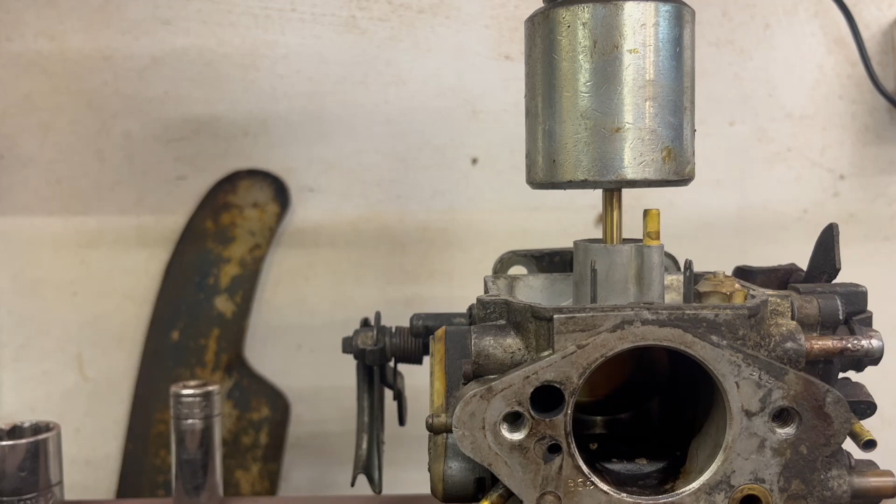Probably too much now. Now, radiator's hot. Oh! I didn't put the damper spring back in. Right.

Hello, welcome to my Saab 90. This is actually a refilm, hence the different wheels, because the first intro I filmed was terrible. So I'll just try to remember what I said. Let's just free flow - this is my Saab 90.

I got it just over a year ago, and it hasn't been on the road since about 2001. Basically all I did was change the oil as a precaution, put some fresh fuel in, a fresh battery, and it literally fired right up. I've had to do the usual countless welding on it because it's an old Saab that's been off the road for a while.

It was just about ready for an MOT until I plugged the old CO tester onto it to make sure it had a chance of passing the emissions test. It was sky high, and I did everything to the carb to try to adjust it, but I couldn't get it below about 9% CO, and I think it needs to be about 4% maximum.

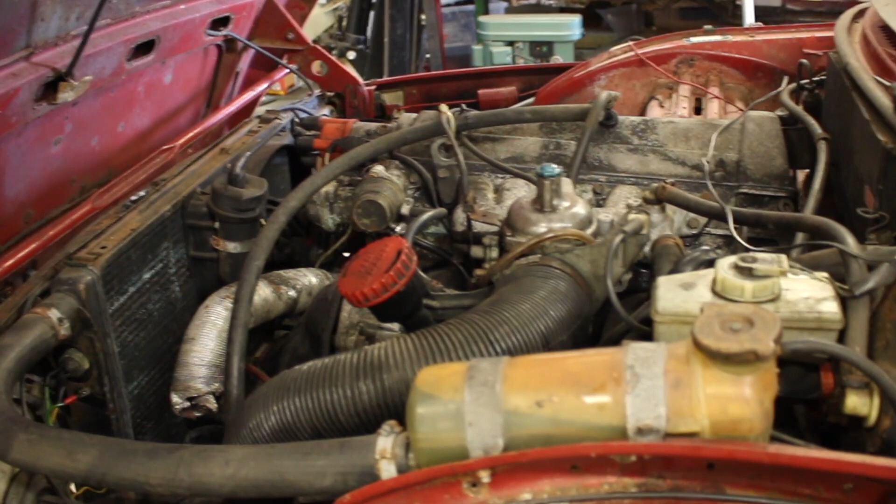Now, I love old British cars. Old British cars have these carburettors on. However, all the old British cars I don't like have these carburettors on, which are Strombergs. Sorry to everyone who loves Strombergs and Triumphs, but they're not my cup of tea. This carburetor is my cup of tea.

I'm an SU guy, I love SUs. They're simple, as are these, but they don't have diaphragms and things. But I'm willing to give this carb a chance because I've only had bad experiences with them - this could be a good experience. I've never really rebuilt one, so I thought we'd do this journey together and do this carb rebuild - get it off, get it on the bench, and see what it needs.

Oh, and yes, there are other videos coming. I've got one on my 900, which I posted on Instagram the other day. That's in the middle of being worked on, but time being what it is, I thought I'd do this quick video now, and yeah, could be quite fun.

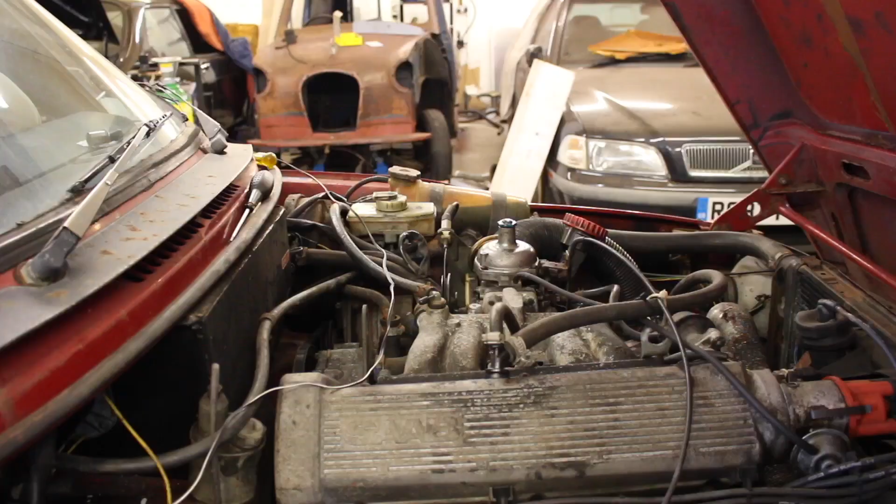So let's set the tripod up and unbolt this thing. Ooh, Strombergs. So let's disconnect things we need to take off. Sorry about the lighting by the way - oh no, I haven't got a tripod to put on. Disconnect things: throttle linkage, air duct, and fuel line, dipstick thing, and then it should all come off nicely.

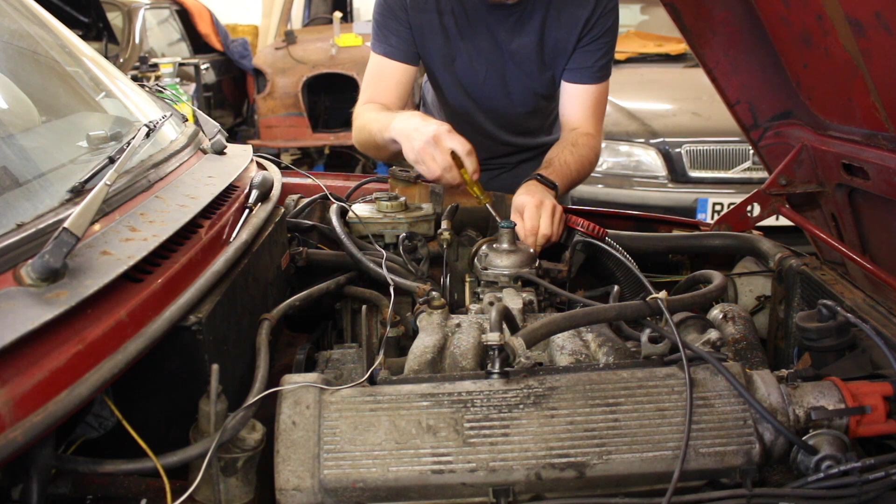Yes sir. Just float around. Oh, I need a torch. That's in the way, so we need to get that off first I think. Oh, that's been opened up. Unhook the throttle cable. I'll lose everything in the scuttle in a minute.

To the bench. Side note - what the hell is that thing? Oh, focus, for goodness sake. Thank you. What the hell is that? It's like a solenoid thing with a wire going on it, but inside it's just a little hole.

There's somebody screaming at me now telling me what it is, but we'll find out later if I can remember or be bothered. How weird, it doesn't do anything, it's just a hole. There's no lines connected to it. We'll find out about that. Cool.

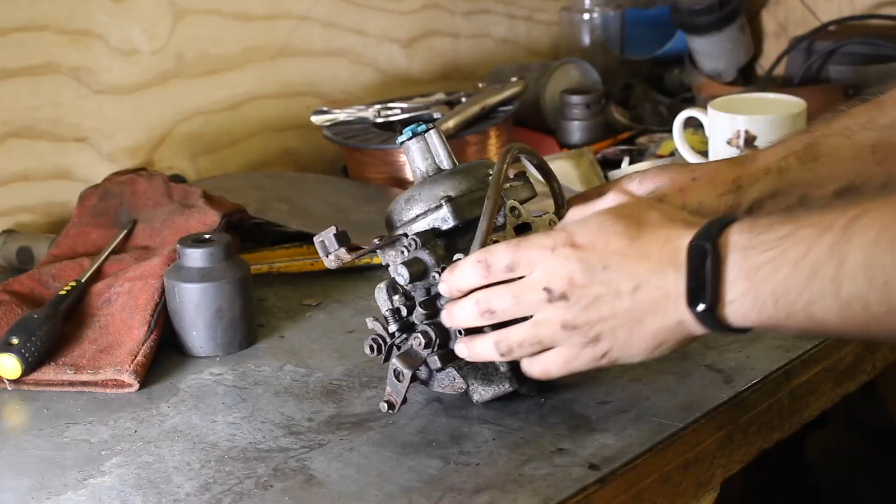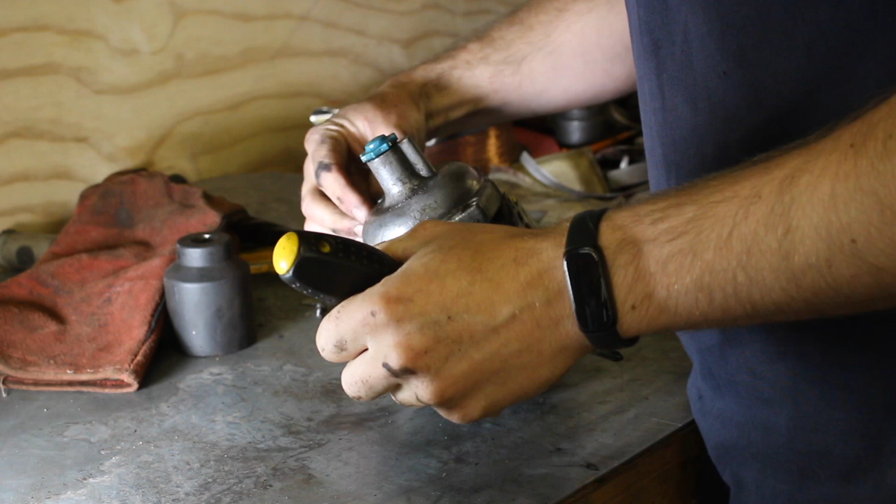So, excuse the mess, it's my bench, so it's chaos. I've suspended a light onto masking tape with a welding glove shoved behind it, so there's some light. So I guess first we shall remove things - on an SU this is always the first thing I remove. I've had this off already trying to reduce the CO levels by seeing if the needle was stuck, but it wasn't. So it looks like we've got float problems, so let's take that off first.

Empty the oil. Now Saabs use ATF fluid. In Strombergs I've seen them use engine oil, but maybe they need a thinner oil to make it not so rich on acceleration, I don't know.

Let's pull that out. Wasted so much ATF taking that apart and putting it back together again. Let's set that to the side.

Diaphragm looks alright, but when the rebuild set comes, it'll come with a new one anyway. When the diaphragm goes, they usually run too lean, not too rich. I shall set that there so it doesn't distort the diaphragm, and I look forward to knocking that up and breaking it later.

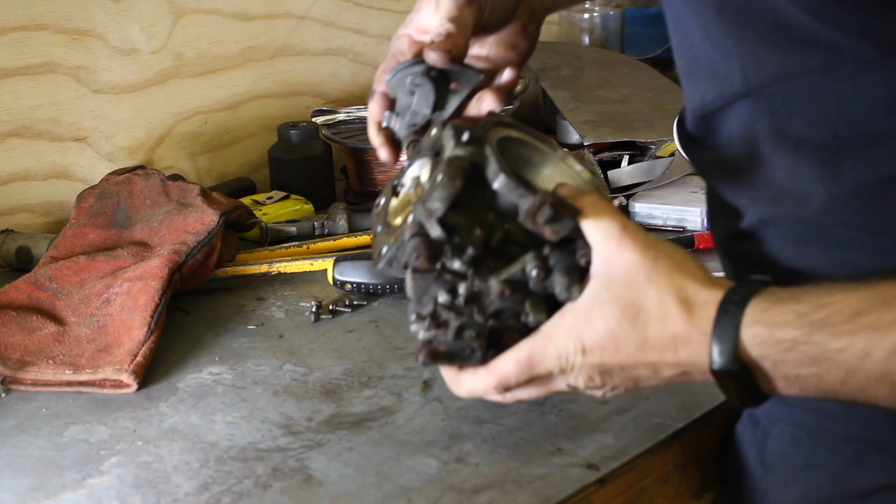So what do we have here then? Like an emission controlled MG. We've got that sprung bugger.

Yes, on the overrun it'll open that and suck a bit of air in. Of course, this is the CD175 SEVX, I think, so that's got more emission control stuff.

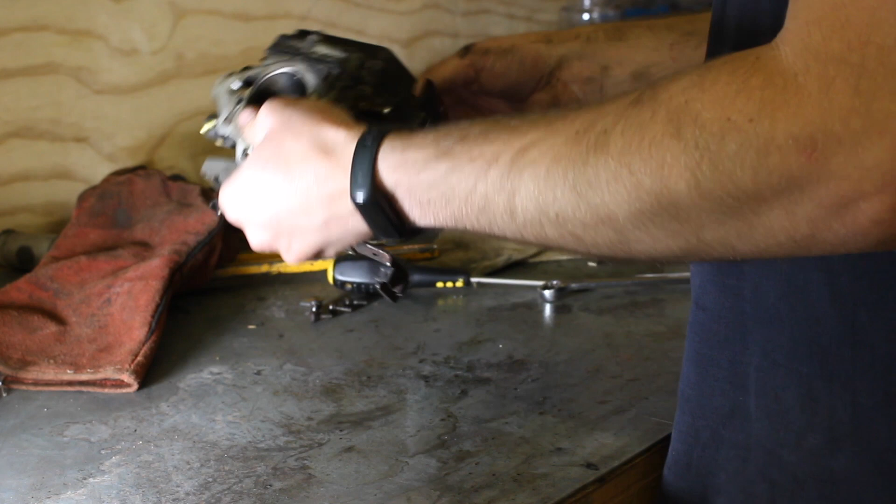That's going to piss fuel everywhere. Let's get a little tray - the mankiest tray I ever did see. Let's pull that out.

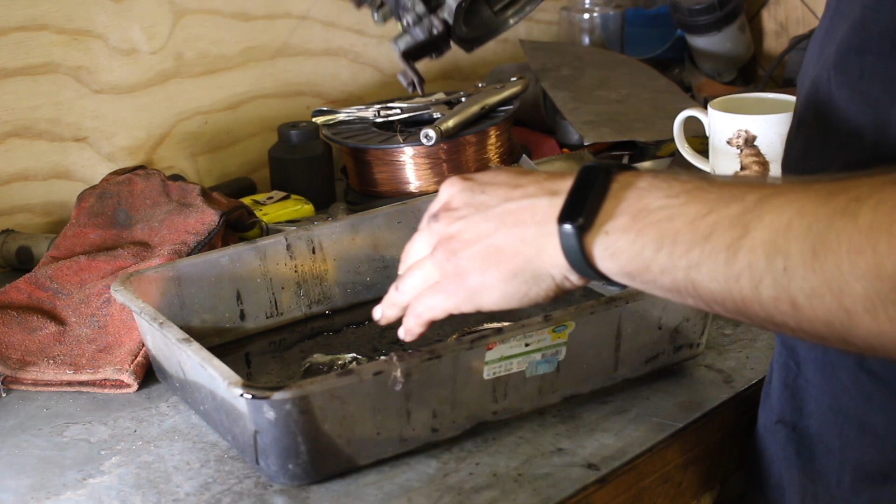To be fair, that petrol doesn't look very nice. Doesn't smell very nice either. But then, I did put the petrol in it last year.

Right, so let us start removing things. I guess we'll take the float chamber off, which is now a flathead.

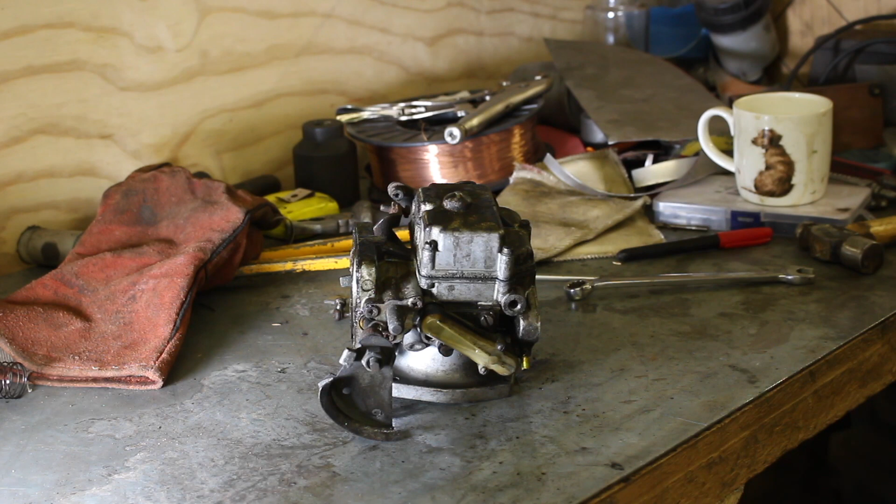Will they undo? Oh yes. I'll just loosen them all first. Oh dear. That doesn't feel very nice. You know when something suddenly loosens, it gives that satisfying snap, but not the snap of the bolt snapping. That's alright, that didn't happen on that one.

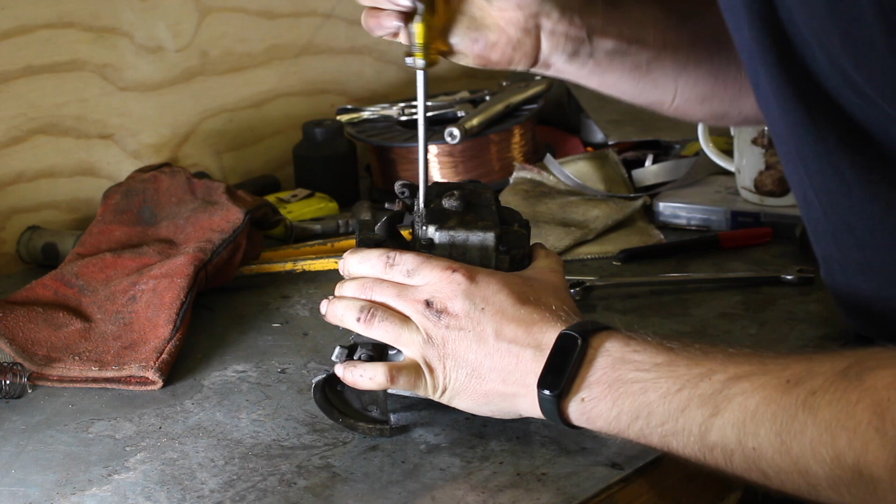There we go. Right, they're all loose.

I always start from the outside and work my way in, like when doing a head gasket. When you take a head off or tighten it up, you tighten in like a pattern from the middle outwards.

Basically I do that on all carburettors like this, because anything but an SU doesn't have a funny pattern. Well, I'm rambling - I do it all like that because it prevents any distortion.

If you do it in a circle, it can possibly distort it. I'm going to get my little plastic hammer.

Couldn't find the magic plastic hammer as usual, so I've got this - that'll do it. There we go. Oh, not too bad in there, really.

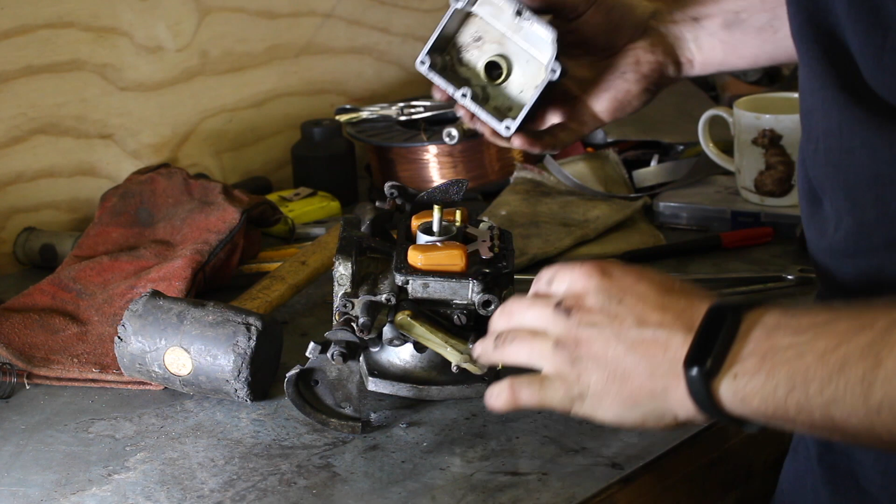That's surprising. Yeah, okay. So I shall check the float height in a minute.

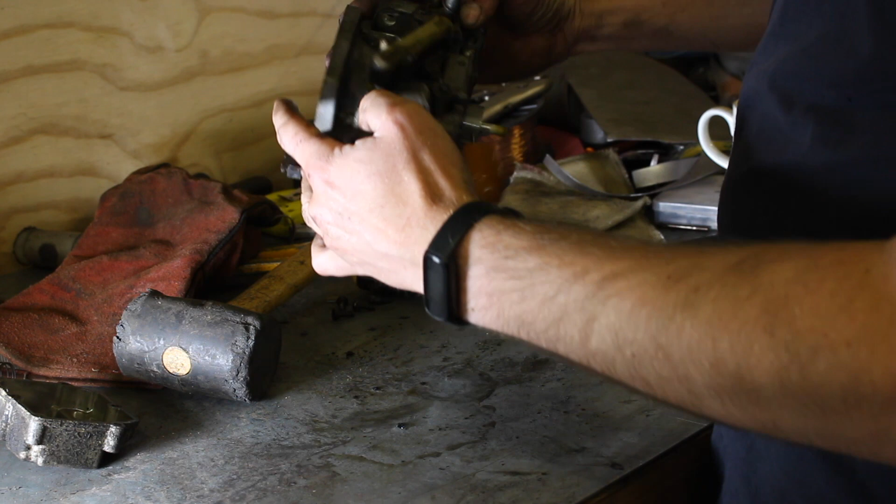Let's find some more fuel. Oh, hello. Let's just check the float is happy. Yep, so the float works.

So let's remove this, which is the temperature compensator. They can stick, apparently. I did do some basic research on these last night.

An O-ring that doesn't look very well. Ah, that might have something to do with it. That is completely choked up. Not sealing.

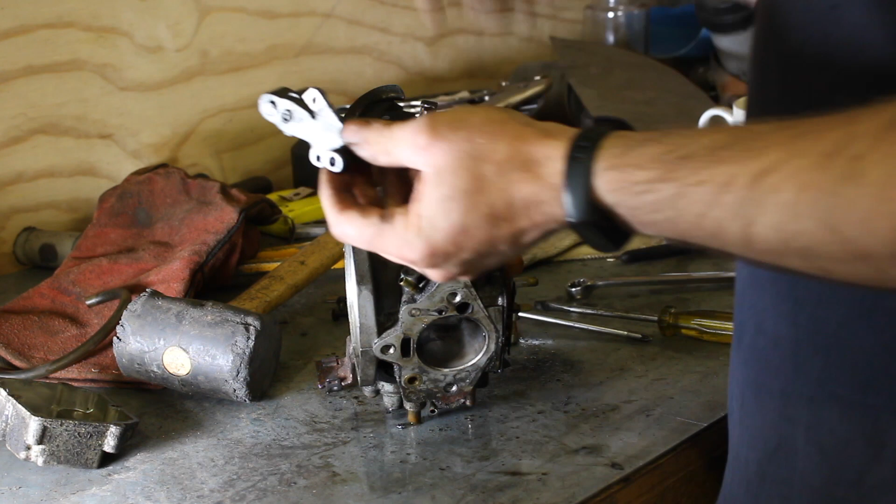I need to read up again on how exactly it works. But my understanding is it passes... no, I'm not going to explain it because I don't know. Right.

Let's remove the choke assembly. If it will.

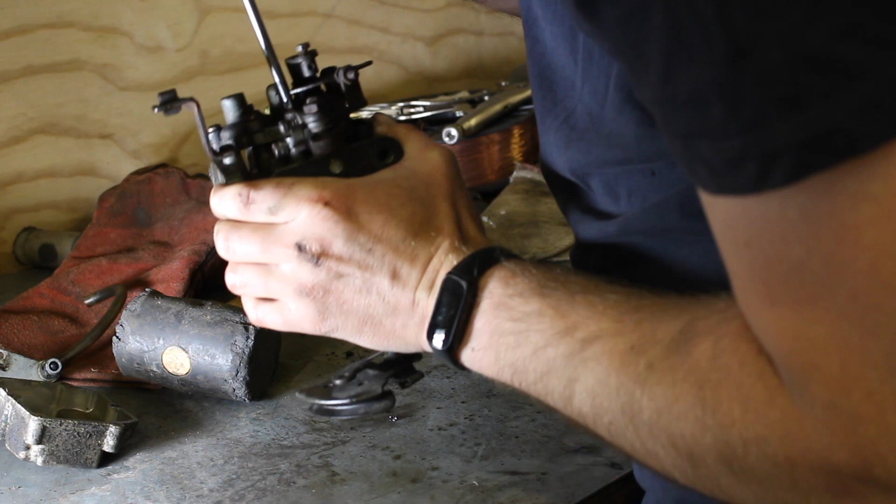Oh yes, I remember now. This is like a cam affair, and that basically just shoves more fuel.

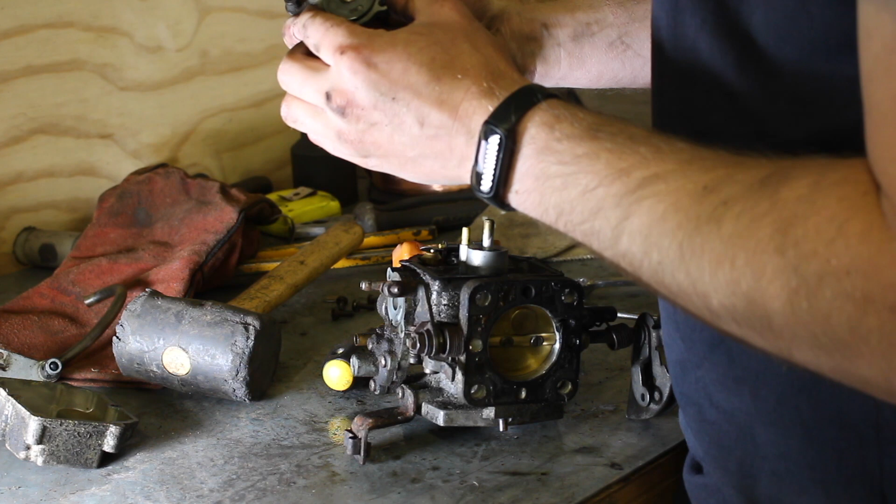Right, we'll take that apart in a minute, set that aside, but as you can see we've got loads of little holes in there. And the choke isn't actually fully progressive, you've got steps. That's full rich, and that's not.

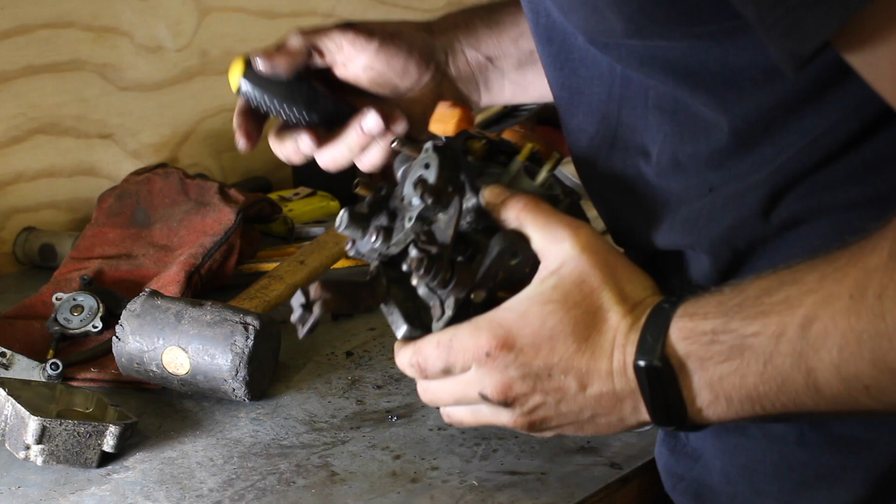Yep. And now actually that should come off. There we go.

Ooh, that's nasty. Yeah, we've got some blockages in there. Oh, and there's a gauze. Ah.

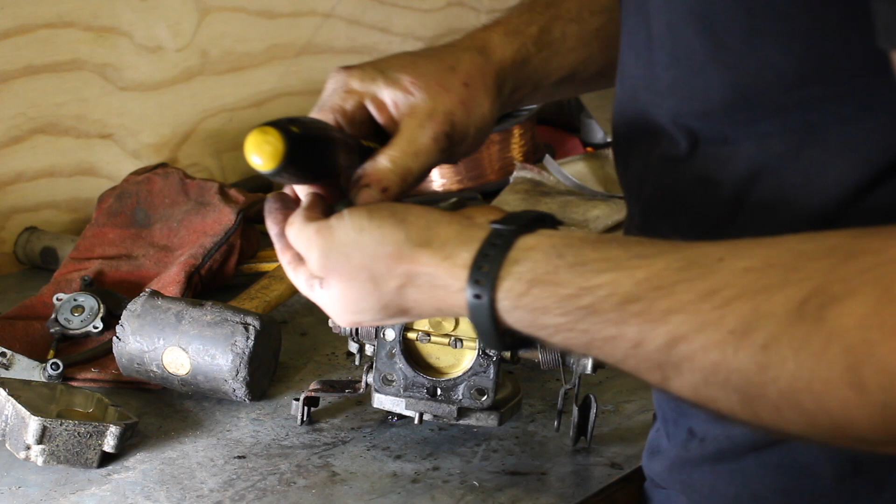I mean, as much as I don't like these, it's actually quite a clever little carb. It doesn't need to be this complicated, but then again, I suppose it has got all the emission control stuff.

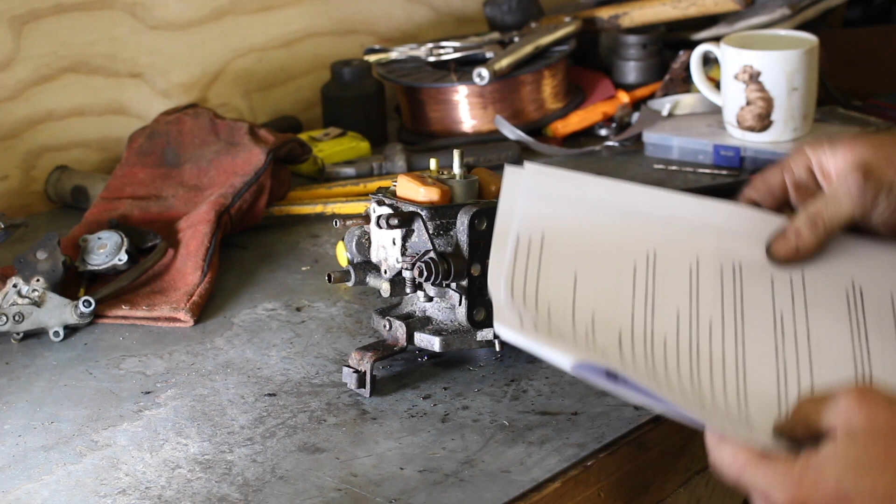Ah, a little diaphragm. Right, so I've just printed off a guide - I think that's the same place - some info from Burlen Fuel Systems. They do all the parts for these and SUs, and buy from them, they're brilliant, they do all the stuff.

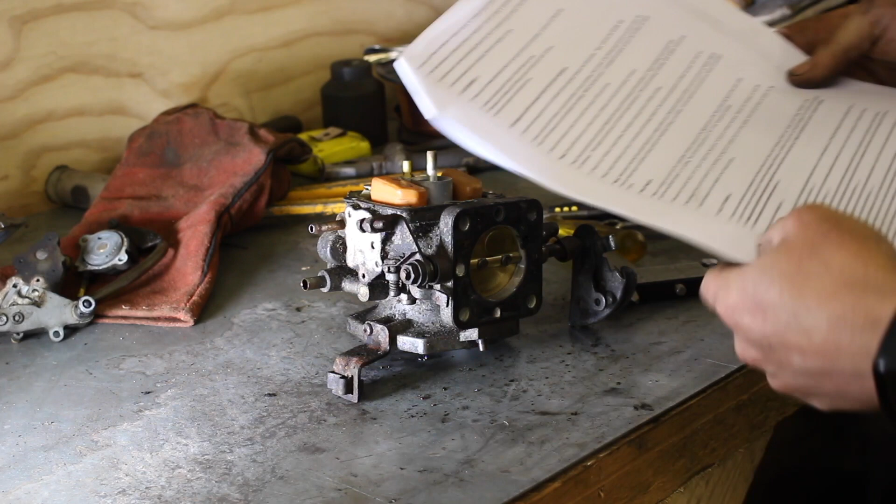So yeah, and I have got some info on what to do, because I realise this isn't going to be a very informative video if I don't know what I'm doing. So first I'm going to check the float height. I need to remove the gasket.

There we go. We need to measure float height - should be between 16 and 17 millimeters with the gasket removed, at the highest point. So let's zero that.

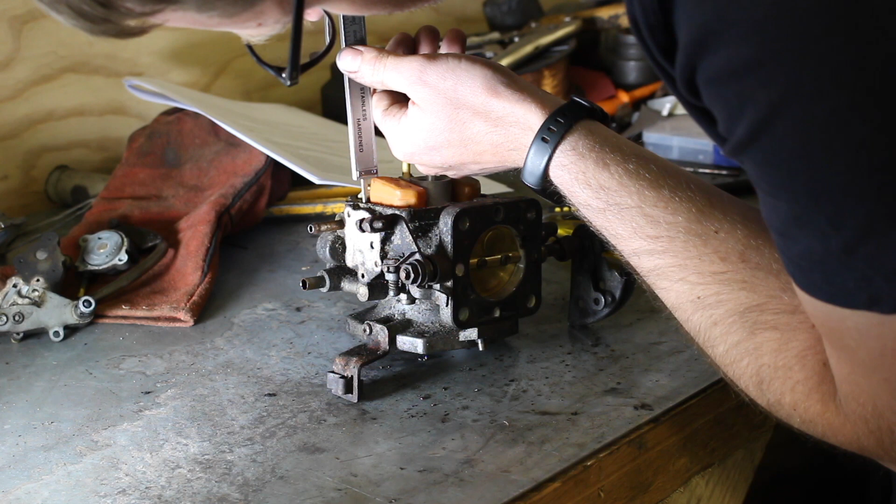And that is 15. Yeah, 15 mil. So let's raise that.

Let's double check that because I'm surprised. Like the other side. Yeah, there is. So to adjust that, we need to...

We're bending the tag which contacts the end of the needle. Right, so we simply need to... actually, this is easier than SU.

Let's just bend that up a little bit. Let's see where we are now. 16. I'll try and get it to about 16.5 because that's just between the two.

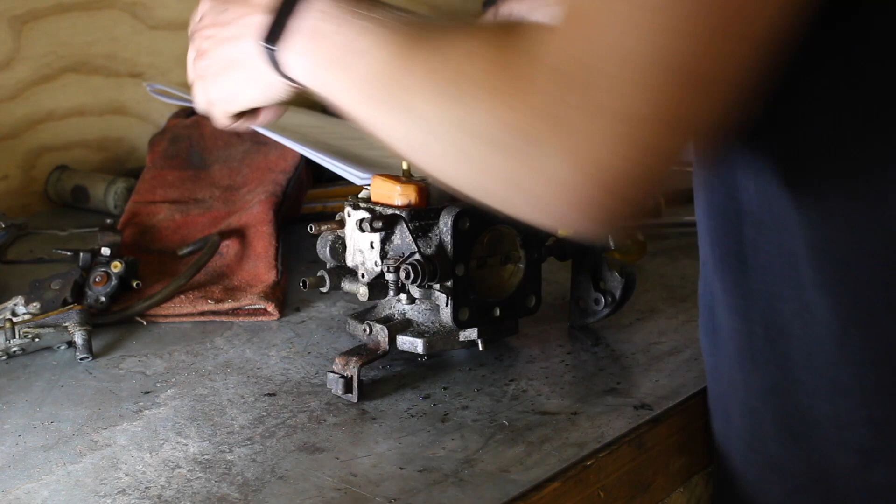16.7, that'll do. Cool, that's still zeroed, turn that off. So that's the float height reset. It's quite nice, we found a few things wrong.

I think next step is to strip all this throttle linkage off. Now, I have heard something about there being a vent system for the float chamber.

I've just realised I shouldn't have done that yet because I'll probably be getting a new needle in the kit. Oh, bugger. Right.

Right. 14. Ooh, that doesn't feel very nice. Ooh, that's got some junk in there.

Let's give that a little blast out with some solvent. I've run out of carb cleaner, so we've got electrical contact cleaner, but it's probably all the same.

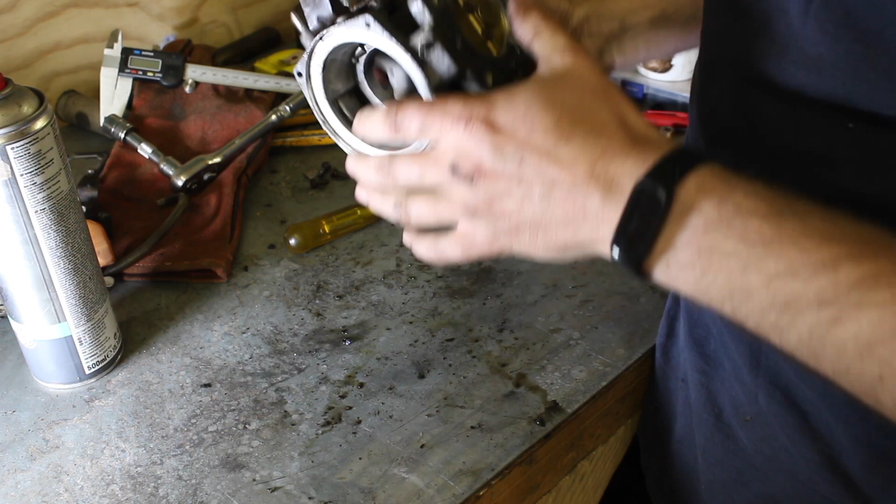So, what next? Shall we remove... that keeps getting in my way. Let's see if that'll come off. That won't come off, that's fine.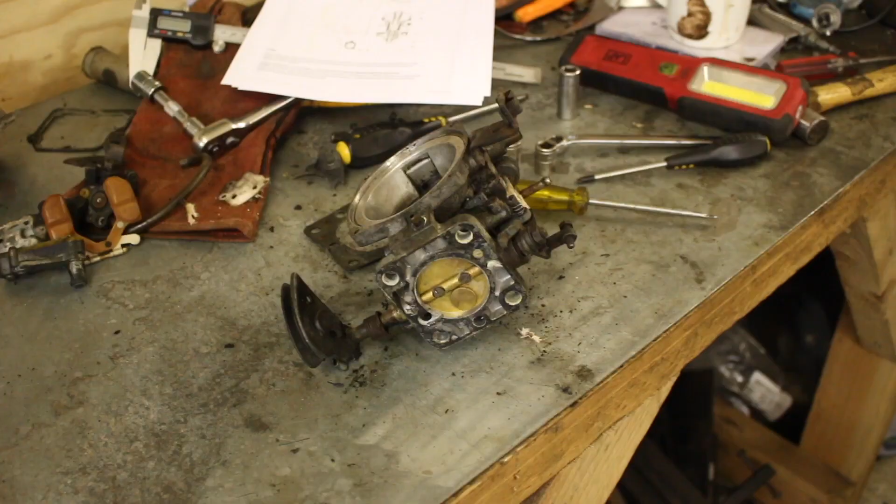Right, so I found out what a solenoid is. It's basically an anti-overrun valve. It's normally open, the ignition's on, and it gives the specified idle. You turn it off, and it basically shuts off that port and stops fuel flowing, which, yeah, okay.

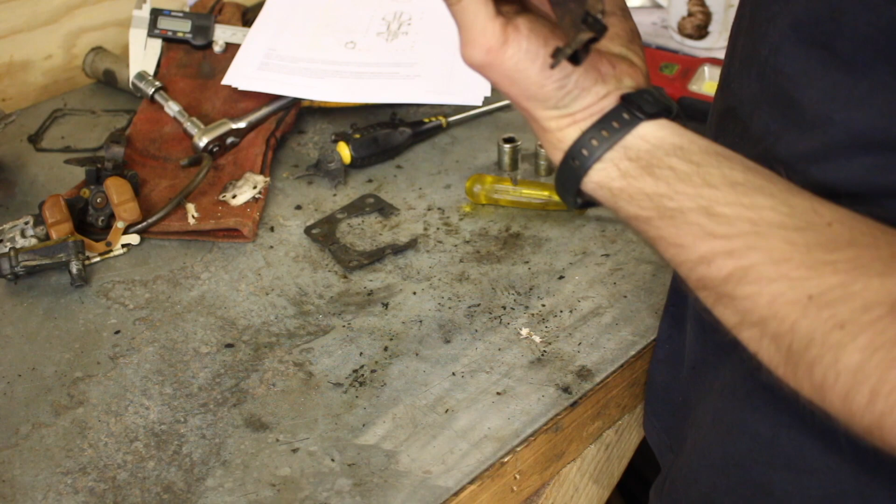Right, so the rebuild kit is here. Unfortunately it doesn't seem to be quite the right one, because it hasn't come with this diaphragm, which I'm now soaking in petrol trying to revive.

I'm pretty sure it is crack free, to be honest. I thought it had a crack in it, but it was just a hair, like a funny line thing. So yeah, I'm going to leave that sitting in some petrol, which is really manky, but it's petrol. See if it will revive.

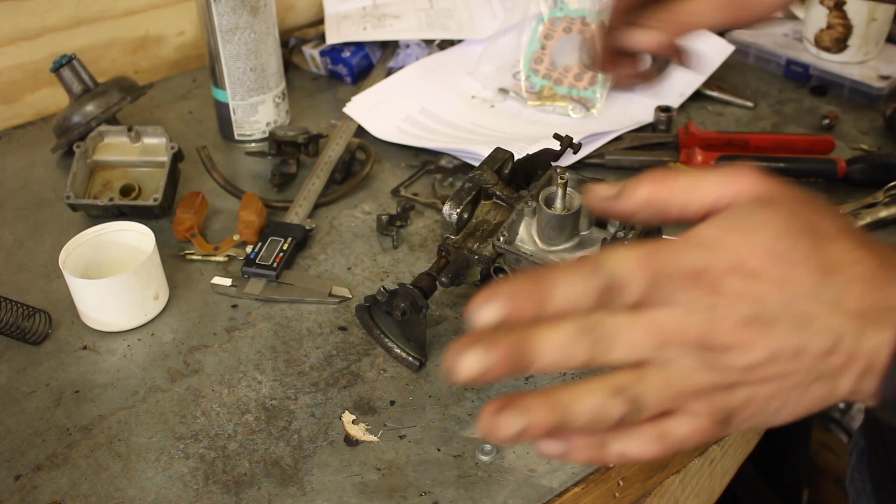But my MOT is on Wednesday, so we need to try and get this back together. Right, so I think what we will start with is - in an ideal world I would ultrasonic clean all this, but time is of the essence.

So I should say that, for context, the MOT is Wednesday and today is Monday, which sounds like I've got a long time, but it's not going to be enough time for the correct diaphragm to come, and I've got 2 days of pretty solid work lined up.

So let's look at the little diagram. We need a couple of O-rings by the look of it.

Are you it? Yes. So let's poke you down in there. Cool.

Give me our screwdriver, which is there. Brilliant. Now, I don't know if I filmed it or not, but I did test that, and it works fine - now it's unseized.

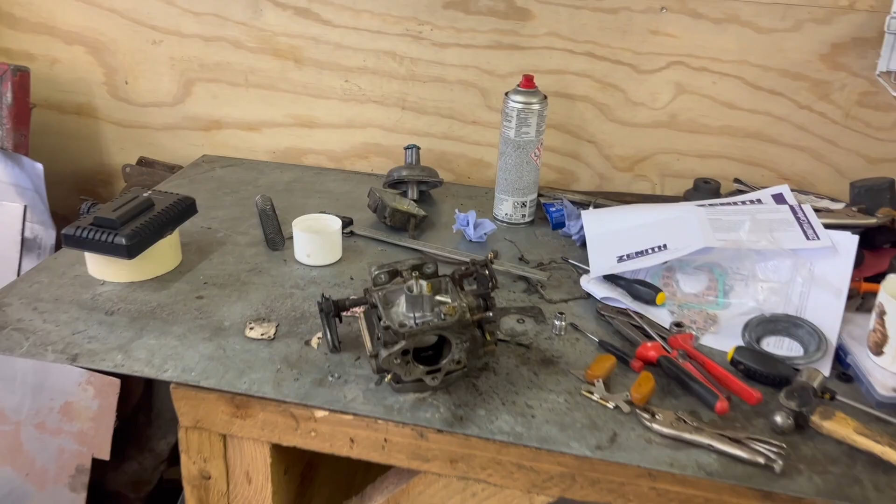Why didn't they supply one? Right, so the camera filled up and I don't know where it stopped.

So, new plan, because that jet - the old jet is ovalized - I know it said don't remove it, but I reckon that will press in. So what I'm going to do, if we flip it over...

And let's stick it in that conveniently placed roll of masking tape. Yes, I don't know if you can see, that isn't perfectly round, so that's going to be affecting the mixture as well.

So I'm going to measure the step. Can I poke your finger in and show you? Yeah, measure the step between - find something pointy. That's pointy enough - between there and the top of the carb.

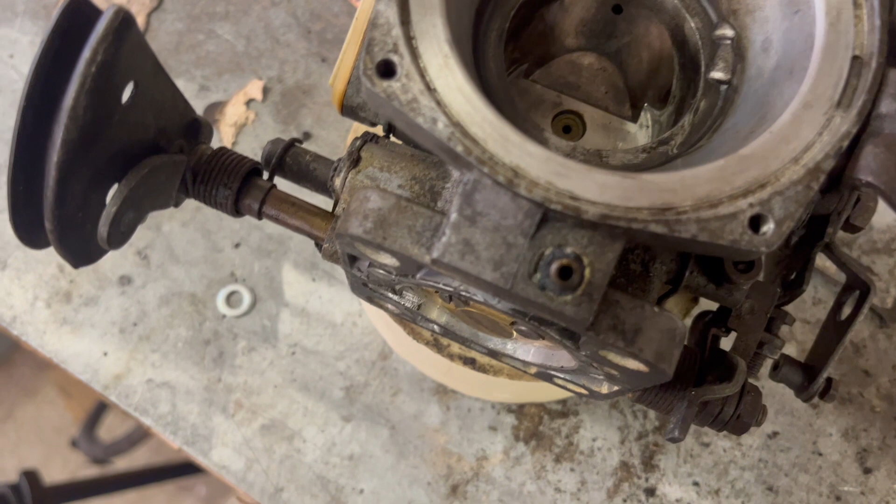Write it down and then press the new jet into the right position. So let's do that.

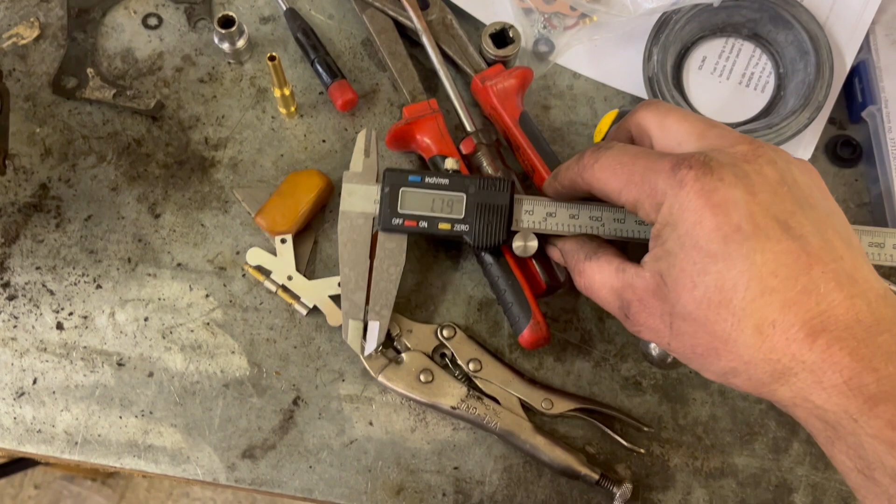Right, so that is 1.79 or 1.8 mil. Oh, I just said it, as near as damn it. So if we get a pen and write it on our Zenith sheet.

So 1 point... yeah... 80. We'll do a little diagram.

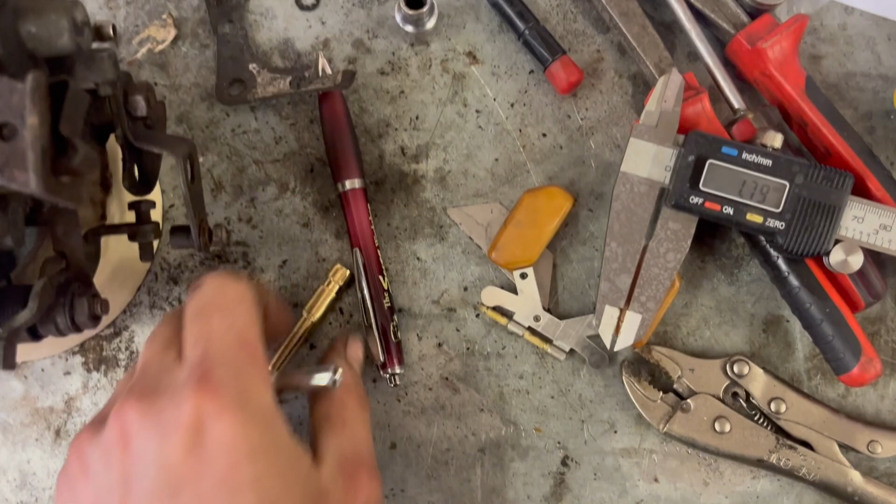Let's find something suitable to press this jet out. Right, so I've got a 7mm long reach... oh, 5mm, that is pretty perfect. Fits on there well, can't do it with two hands, but fits well. Right, let's try and press that out.

Right, so I couldn't film it because I need three hands. But let's go and compare that to the new one. Hopefully it's all the same.

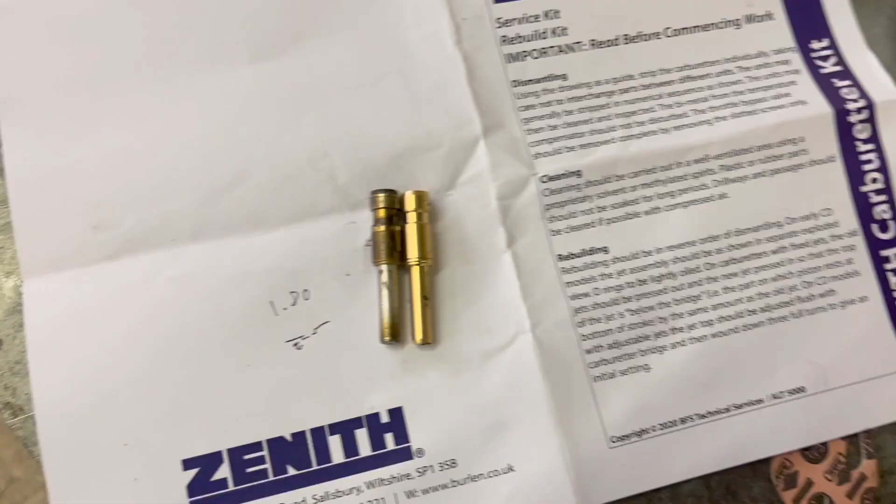Yeah, I mean the pickup is so... oh no, they're exactly the same. Do we have any markings on the side for size? Nope.

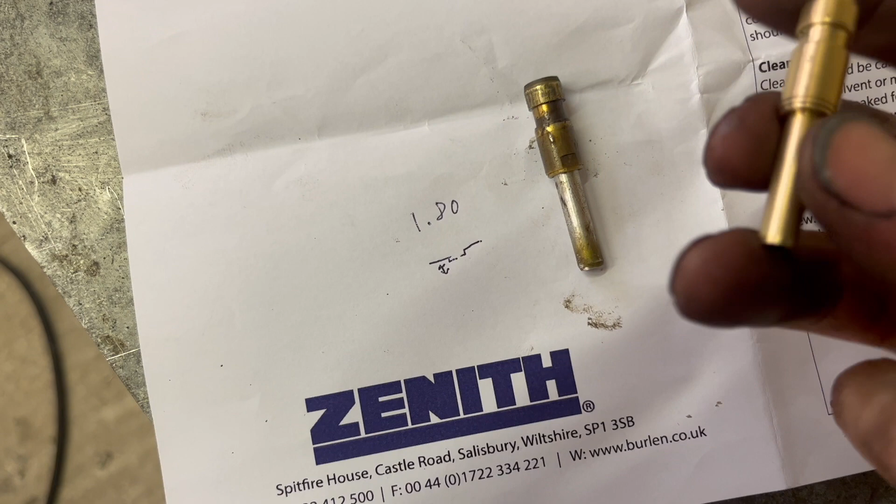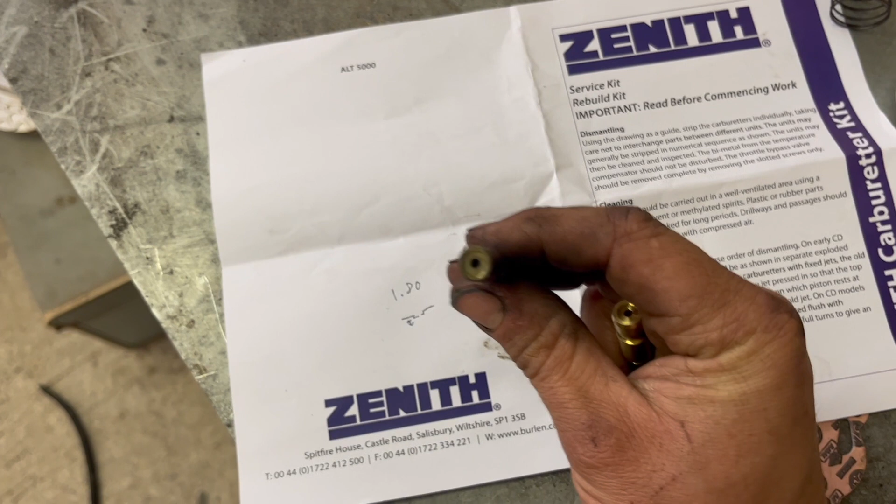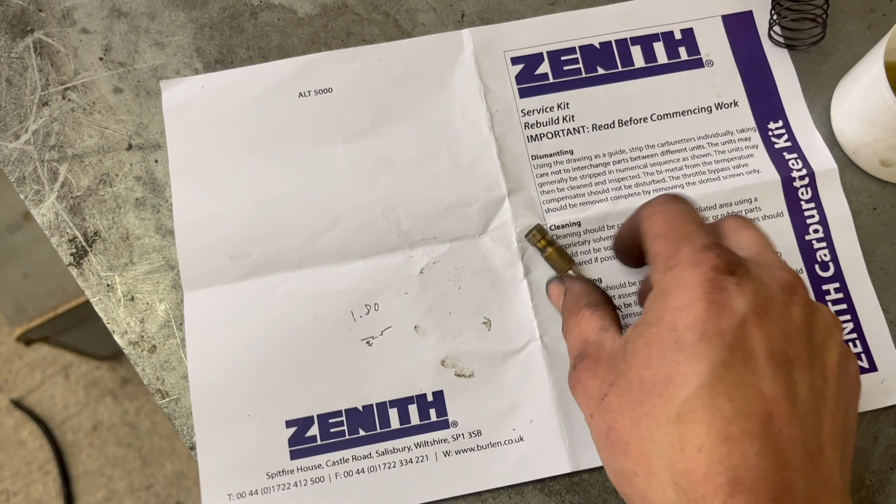So I guess press the new one in through the bottom? I reckon so. Yeah, let's compare sizes. So that is... you can't quite see it on camera, but that one isn't really very round, and that one is. So let's see what we can do.

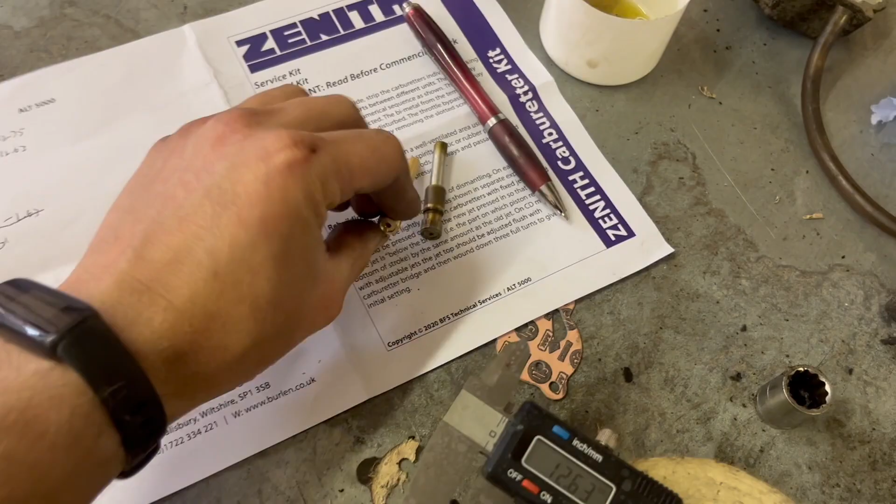There we go, so I just measured the hole in between, well, compared the new one to the old one. And yeah, there we go: 12.75 on the old one, new one is 12.63. So that might make a difference.

Side note for all those screaming at the camera, I didn't re-zero the caliper, so it's not actually 12.75, that's a ridiculous size hole. It was actually not that, but still, you can see it's bigger. But I did make sure I zeroed the caliper when I was doing that height.

So as you can see, the new one is pressed in so far, but it's 2.61, should be 1.80, so I need to press that down a little bit further. I'll try and do it on camera.

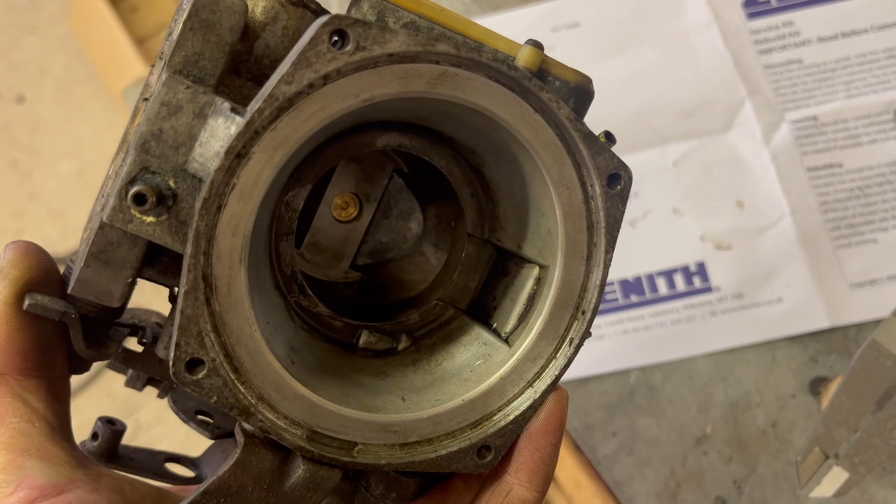I am pressing on the end of the jet, which is risky because it's brass. But YOLO, as the young'uns say.

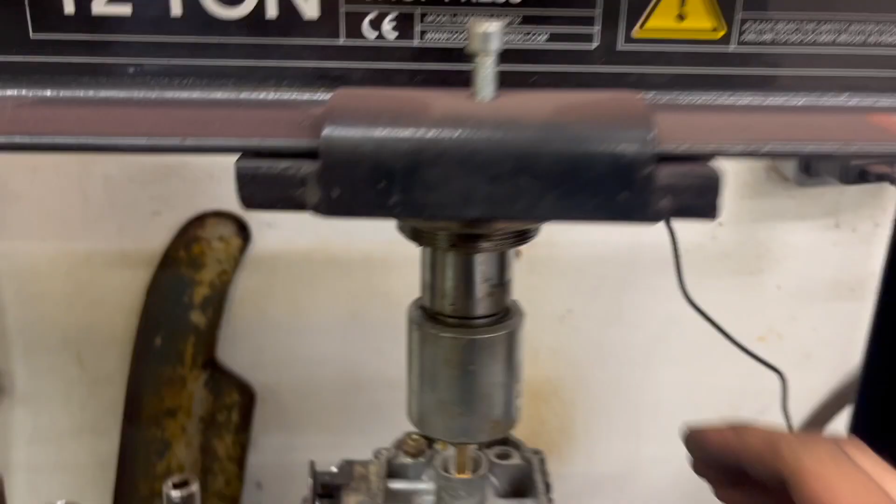Now we need to go down the tiniest whisker. Like that. Right, let's remeasure. Don't let that go up all the way. 2.28 - ooh, little way to go.

Oh, check I zeroed it again. Didn't. Right... what? Oh yeah, it's minus something, wasn't it, on the zero calibration? Yep, that one goes 2.44, right - more.

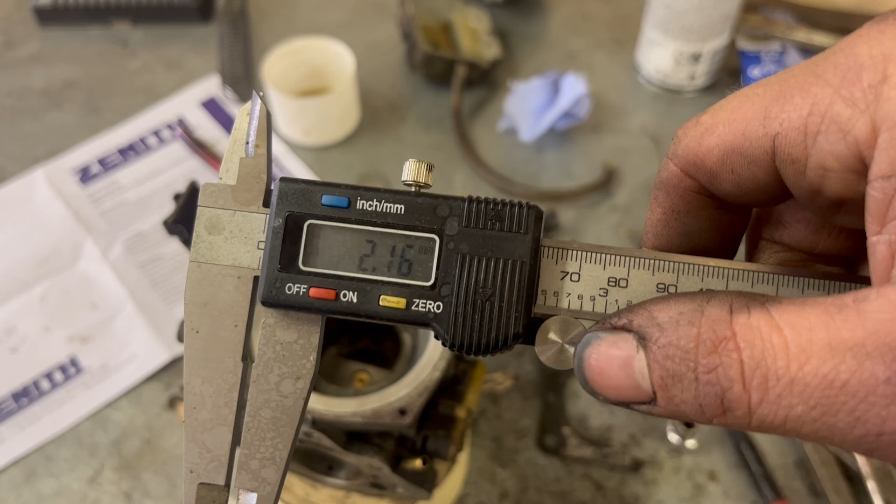Let's try that - 2.16. More. So how... yeah, millimeters is actually quite a lot, isn't it? Okay, back to it.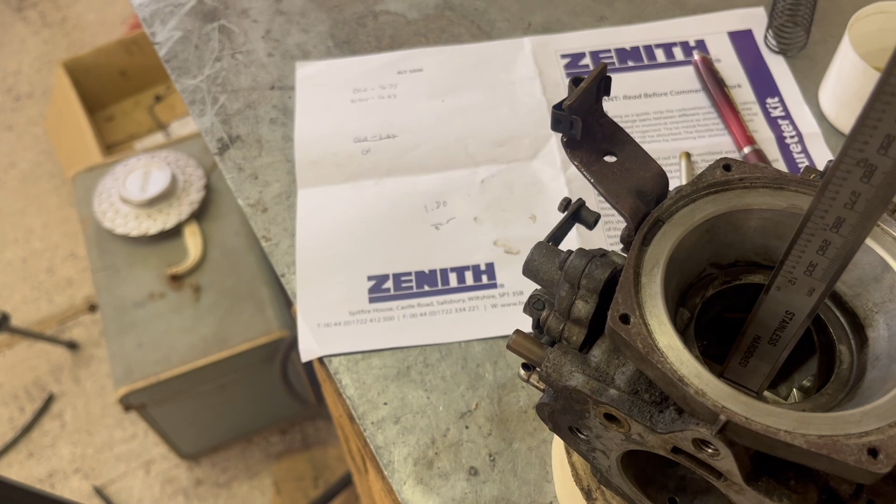Probably too much now. Zero it - oh, it's zeroed. Okay, oh what's that, wrong way up. You know what, I'll take that, that will do.

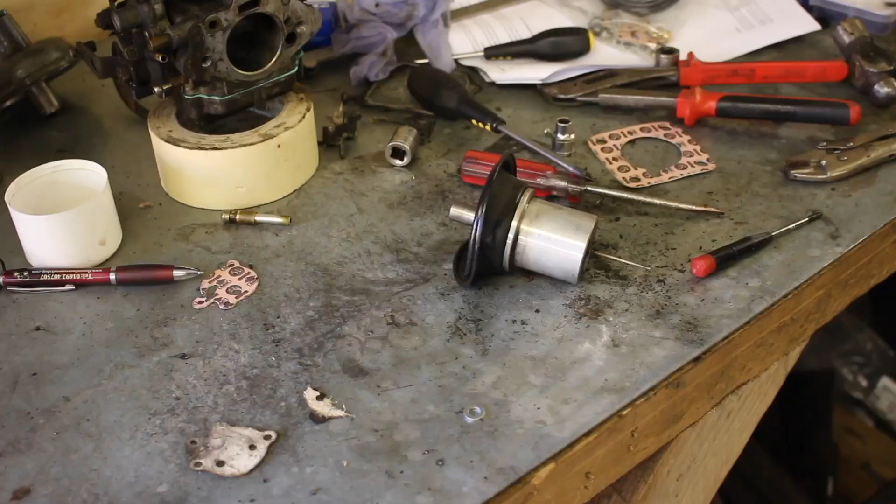Well, we've got the camera back. I've emptied the card. Now, I was going to put the carb back together, all back together, but I remembered I need to change the diaphragm because the one it came with is ancient. It will probably go halfway down the road, because if the diaphragm goes, the car will idle fine, but you won't be able to go anywhere, which isn't ideal for normal running.

Right, that's on. I'm going to fill this with oil once it's on the car. I've reattached the mystery throttle, the vent chamber thing, but now I remember I need to set the base idle, which I'm going to do half, one and a half, I think. Let's put it on the car.

So I haven't bored you with putting the carb back on because you saw it come off. But what I will do, just to note, I'll show you my way of getting the choke cable correctly set up. I've already done it, so I'm just going to act it out now.

So I always pull the choke lever out just a tiny fraction after inserting the cable in the hole. Yeah, so imagine that loose - focus - yeah, imagine that loose. Obviously push the choke all the way down, the choke lever so it's fully off, and then tighten the nut.

And then you go in the car, pull the choke out, push it back in again, and from my experience the choke is then set perfectly every time. There's no sort of overhang on the choke knob, it's not holding the choke on too much. It is perfect. So now, everything's connected up.

Oh, I need to add some dashpot oil, which on a Saab is ATF for some reason. Anything else like Triumph, it's engine oil, but for some reason Saab is ATF. I don't know if it's because it's thinner, it needs...

And this is the point the microphone stopped working again, because that seems to be the theme. I was probably babbling on about dashpot oil or something, I don't know. So once I've done this, I will start the car up. There might be some sound left in there so you can hear that, but bear with me, we shall see what we can do. One day I can afford some new equipment and things, which would be nice.

So the idea I was going to do is tapping the jet down, because I might have got the jet up too high. But we'll actually find out that wasn't the case in a minute. We'll see how much more sound we've got in this clip. Enjoy.

Yeah, it sort of goes - that means it's too lean. And then it goes up.

Although I suppose I should check my ignition timing. Let's check the ignition timing. It's 9 degrees, I don't know if that's good.

Let's plug the... ignition timer seems spot on.

Now that needs just tweaking a little. These Gunson's Gastesters, they're cheap and nasty, but they're brilliant. I think this one was 60 quid - that's English pounds. I mean, it's slow, you have to wait for it to react.

It's still lean. Hang on, the tube is full of water.

So it should spike now. Yeah, it'll spike a bit. And it should go down.

Possibly I've gone a bit too far. No, I'm going to leave it at that.

What's the rev counter saying? I know it's not an accurate measurement, but it's saying 1 grand, so I'm going to turn it down a smidge.

Wait for the fan to shut up. You know what? I'm happy with that.

Cool, 3 point - book says 3.5. It is. Doing that, but low is fine. At least it's not 1 like it was.

Oh yes, because to be honest, I think it's just hot now. So I reckon we shall turn it off, come back tomorrow, and see what's occurring.